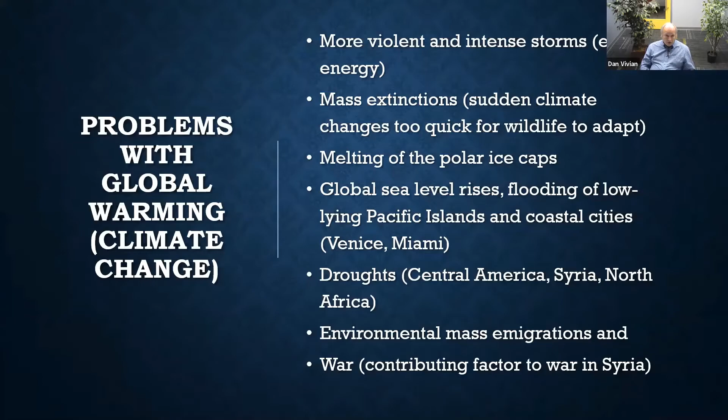And climate change is related to the greenhouse gases that are being produced by the burning of fossil fuels. So how does that work? Well, it works like this. Here's an illustration of the sun beaming radiant energy through the Earth's atmosphere. The energy shines down on the surface of the Earth and warms the Earth. The atmosphere contains a layer of carbon dioxide.

The high-intensity solar rays at the 8,000 degrees Celsius that the sun shines through the atmosphere penetrate the atmosphere easily. They shine onto the Earth. A lot of that radiation would normally be re-radiated out. But carbon dioxide captures the lower energy radiation that re-radiates out. It captures it in the atmosphere, and it warms the atmosphere up. So this is the same effect that you have in the northern climates, Canada, northern US.

When you go out to your car on a sunny February afternoon, and the sun's shining through the car windows, it warms the interior, the upholstery, plastics, carpeting, but it only warms it up to 15 degrees Celsius versus the 8,000 degrees Celsius that the sun shines in. That radiation re-radiates out at 15 degrees Celsius, but it's not intensive enough to pass through the glass.

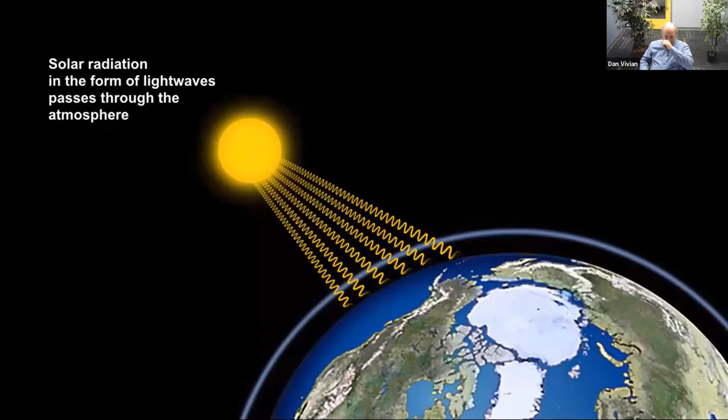So the glass itself acts like a check valve. It's a greenhouse that's happening in the car. And the same goes on with our atmosphere. So that's the mechanism that causes global warming.

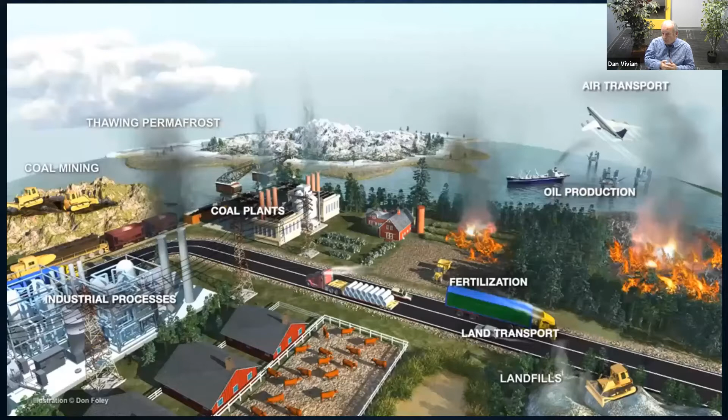Where does the greenhouse gas come from? The greenhouse gas is actually carbon dioxide and some other molecules, but the ones that are man-made, the ones that are changing the equilibrium of the Earth, are caused primarily by the burning of fossil fuels. And we have fossil fuels burnt significantly in things like coal mining, coal plants, industrial processes, land transportation, landfills, fertilizer, oil production, buildings, and air transportation. All of those things contribute to greenhouse gases.

How significantly? Just in approximation, about 40% of the man-made carbon dioxide greenhouse gases comes from transportation. This is North American, or more generally, the first world. And in the first world, those are the major contributors to greenhouse gases and climate warming. So about 40% comes from transportation, about 40% from buildings, and the other 20% comes from industry.

And oftentimes you'll hear different statistics. You'll hear, well, what about agriculture? Well, what is agriculture? Agriculture is made up of things like tractors and pickup trucks and stake trucks and transports, all on the transportation side. And on the building side, agriculture is made up of barns and farmhouses and sheds and warehouses and things along that line. So agriculture is mainly made up of those two more basic contributions, transportation and buildings. The other 20% is mostly industry.

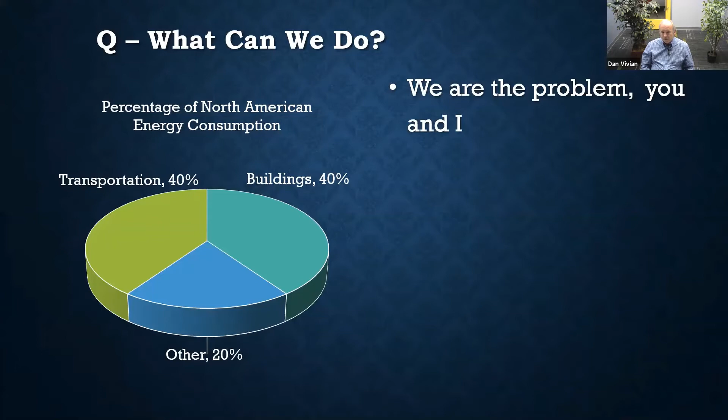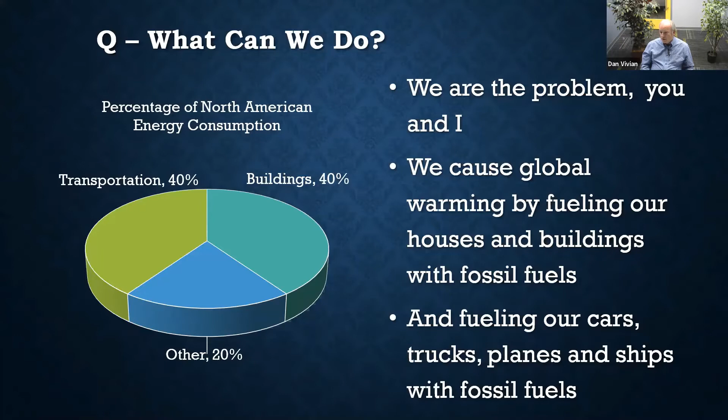So who's the problem in creating these? We are. You and I are the problem. We cause global warming by fueling our houses and our buildings with fossil fuels, and our cars, trucks, planes, and ships with fossil fuels. So the transportation and the building side. So I want to talk to you about how we can economically move our buildings to renewable energy.

Renewable energy has no greenhouse gases during its operation. There is some embedded energy in the components that make the renewable energy, but they are not as significant as the operating energy. And as our grids get greener, that percentage drops off. So tonight, I'm going to talk about the 40% portion, which is the building portion.

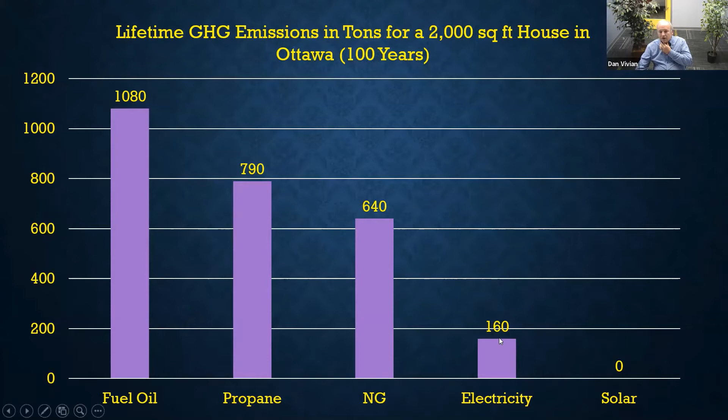So here's the approximate greenhouse gas emissions for a 2,000 square foot house in Ottawa, depending on the fuel that you use. So for fuel oil, propane, natural gas, electricity, you can see how they decrease in order. Anywhere from fuel oil, which is very dirty, over 1,000 tons over the 100 years of its life, versus solar, which is down at 0 for the operating greenhouse gases. Electricity in Ontario is pretty green. It'll be down at 160.

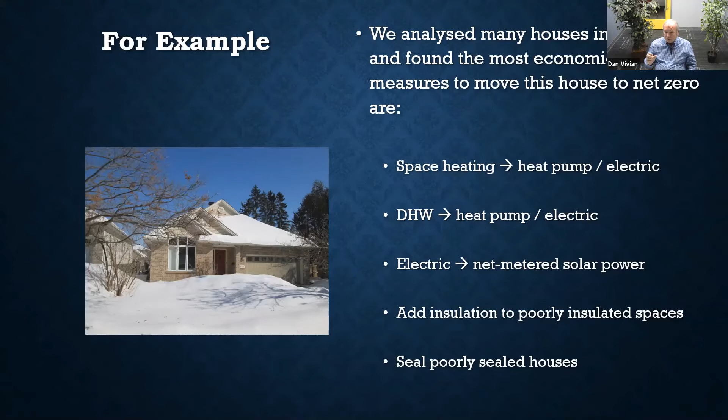We add, on occasion, insulation to poorly insulated spaces, and we seal poorly sealed houses. By poorly insulated space, I mean if your basement walls have no insulation on them. I'm not talking about a basement with some insulation; this is no insulation. Or if your attic has very little insulation, then we would top it up. And for poorly sealed houses, think along the lines of a drafty farmhouse. Those are the ones, and I'll show you the reasoning why.

Cost of solar power comes in at just a little bit less than 8 cents a kilowatt hour. And you say, well, I thought the sun's free. Yes, the sun's free, but the initial capital is not free. And so what we've done is we took the original initial capital costs of the solar panels and all the electronics that go with it, and we divide that by the number of kilowatt hours that the solar equipment will produce over its lifetime, and we come up with this dollar per kilowatt hour figure.

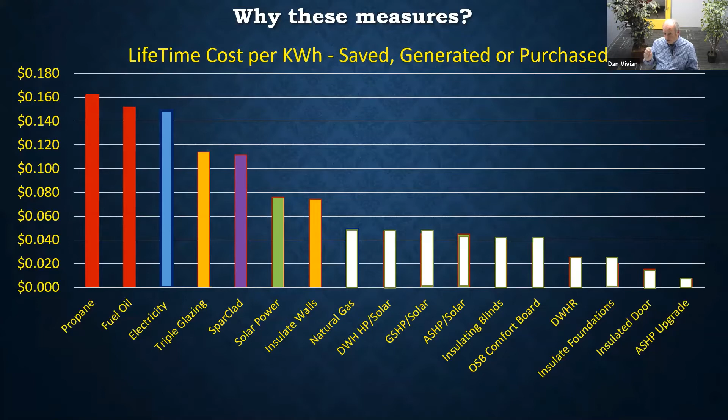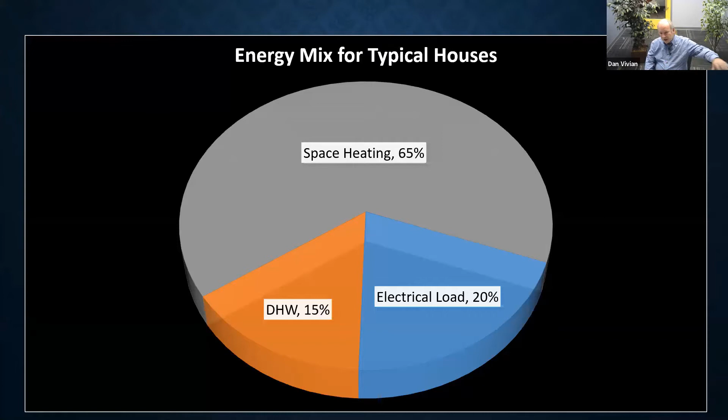So how does that affect your house? About 65% of the house is in space heating, 15% is in domestic hot water, and 20% of the house is in the electrical load. So we're going to use that insight from the previous slide to apply to our house loads. So these are typical house loads for Ottawa and actually across the majority of Canada. That's climate zone 6, climate zone 5.

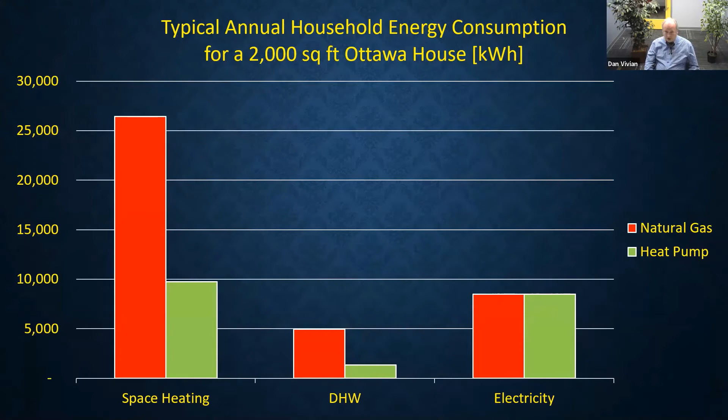So here we can see the difference that a heat pump makes. A heat pump reduces the amount of energy that is consumed because the heat pump is actually gathering environmental energy. So in space heating, you can see that the difference is about a 60% reduction, slightly larger on the domestic hot water heating, and of course a heat pump doesn't change your consumption of electricity. This is a slide on how a heat pump works. I'm going to skip through that. We're a little bit tight on time.

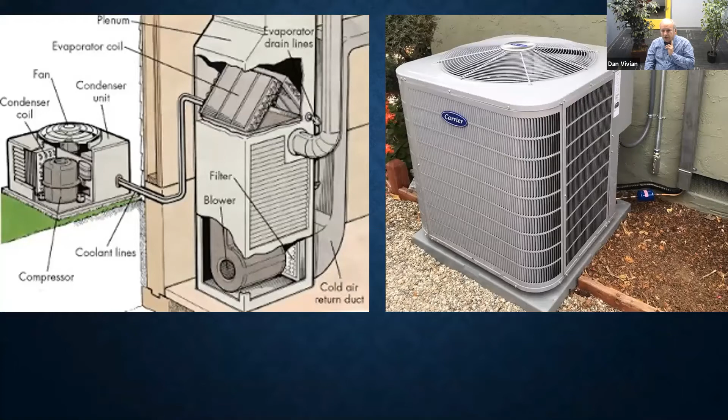Here's the important slide that I want to show everybody. This is comparing the costs of various fuels, of natural gas, to heat pumps and the decrease in greenhouse gases that are produced by using a heat pump. Remember the last slide, heat pumps reduce the amount of energy that's consumed. They reduce the amount of greenhouse gases that are produced. That's what we're trying to get to. And here's the significance of it.

So over the life of a furnace, the energy and furnace costs combined would be around $33,300. The yellow bar is the capital cost, so the cost of the furnace itself. The red bar below it is the energy costs over its lifetime. And that would produce over the 20-year lifetime 103 tons of greenhouse gases, your single furnace. The best value is actually a heat pump with a natural gas backup.

Heat pumps don't work in the extreme cold, and by extreme cold I mean about -20 Celsius and lower. They use a backup heating, and there's two options. Typically, you can use natural gas if it's available, or electricity with electric resistance. So that cost was $27,300 over its lifetime, and a reduction down to 48 tons. That's an over 50% reduction, because there's two inputs into that.

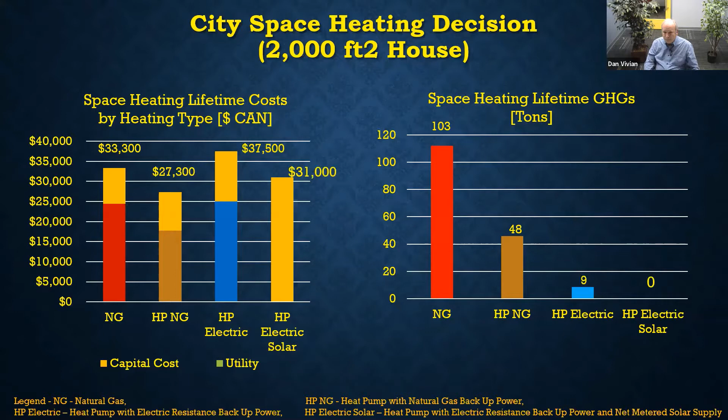In the country, this is even better. So the fuels available to you in the country are fuel oil, propane, electric resistance. Remember from the first graph, they're all very expensive. So in comparison, we're talking about over $70,000 over the 20-year lifetime of the furnace. Comparing that to a heat pump with electric backup or a heat pump with solar backup, we're saving in the order of $40,000 over its lifetime.

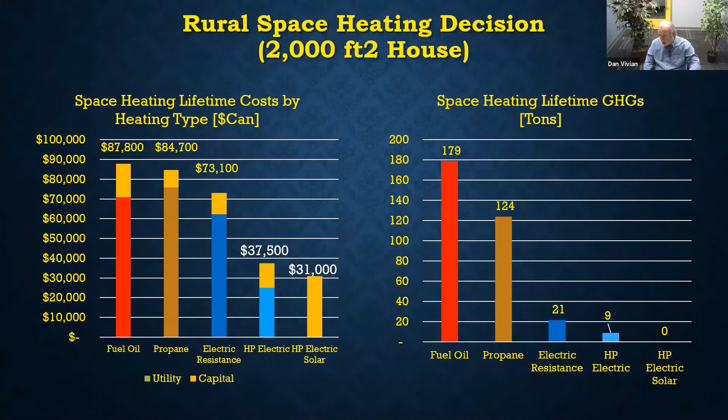Very significant. And on the greenhouse gas side of things, fuel oil being the largest contributor of the fossil fuels, we would drop down from 179 tons over that 20-year lifetime of the furnace, down to 21, 9 tons, or no tons, depending on whether it's electric resistance heating, a heat pump with electric resistance backup, or a heat pump with solar.

There's a similar decision with domestic hot water. Domestic hot water, unfortunately, you're not going to save money on that one. I'm going to go through this quickly. It's on my website, and at the end, you'll see the website.

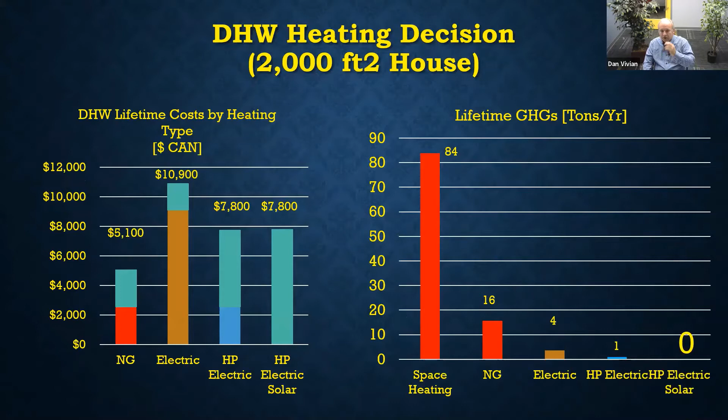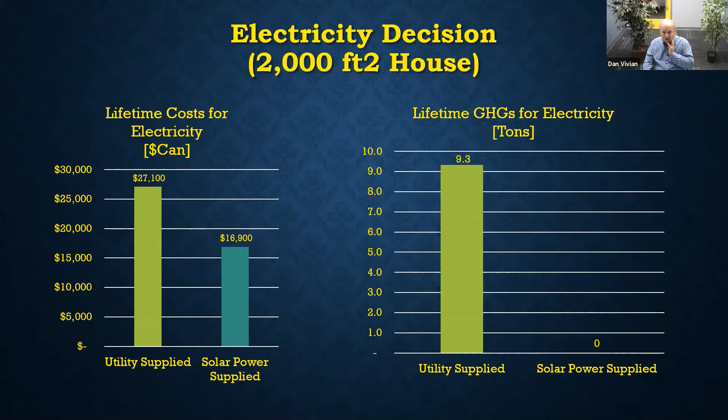When do we change our components? So I want to illustrate that we don't recommend you go out and change everything right away. We recommend that you change into the more sustainable equipment at the end of the life of your typical heating and cooling appliances and your overall electric supply. So a furnace lasts around 22.5 years. You'll replace that with a heat pump.

Domestic hot water, you can replace that with a domestic hot water heat pump, or electric heat pump, and then back it up with solar power. A boiler, offset it with solar power, not back it up. A boiler may be around 20 years, the central air conditioning 20 to 25 years, and a split AC 15 years. We do those studies. We tell you when it's time to move your equipment over.

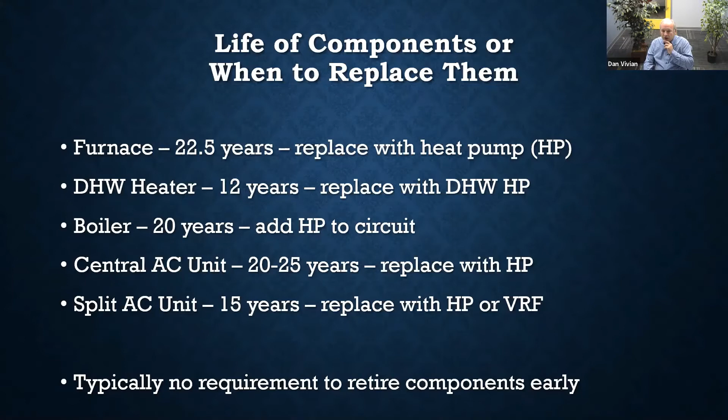We look at the nameplate data and serial number and find out how old your equipment is, and then make our recommendations. That will, over time, create a plan to reduce your greenhouse gases that looks like this. We start off with the base case at around 40,000 kilowatt hours per year and around 6,000 kilograms of greenhouse gases. And depending on the measure, we say right at the first to offset your electricity with solar panels.

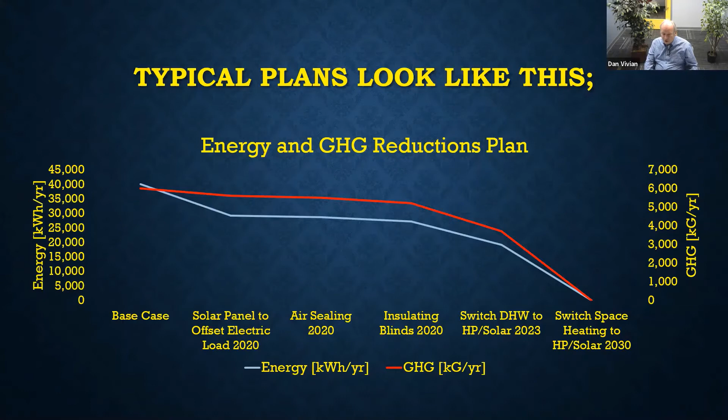And then we say whatever sort of energy conservation measure makes sense. So in this case, it was air sealing and insulating blinds. And then we switch your domestic hot water, in this case, because the domestic hot water needed to be changed before the space heating. If the space heating needed to be changed, we flip those two around. We'll do that at the end of the life of the equipment. And we set out a plan so that you can move your house, your building, off of fossil fuels, off of greenhouse gases, and it's economical at the same time.

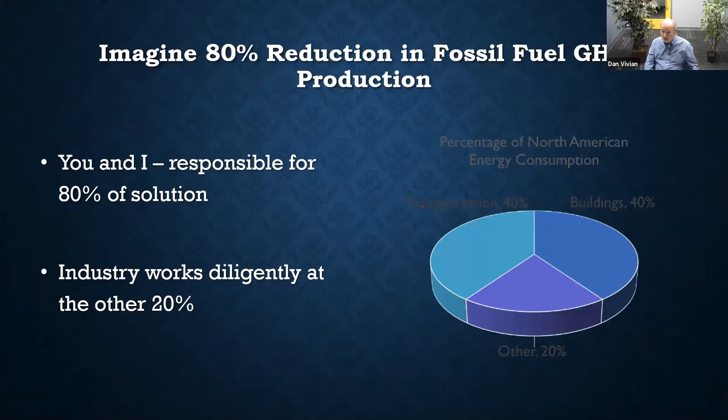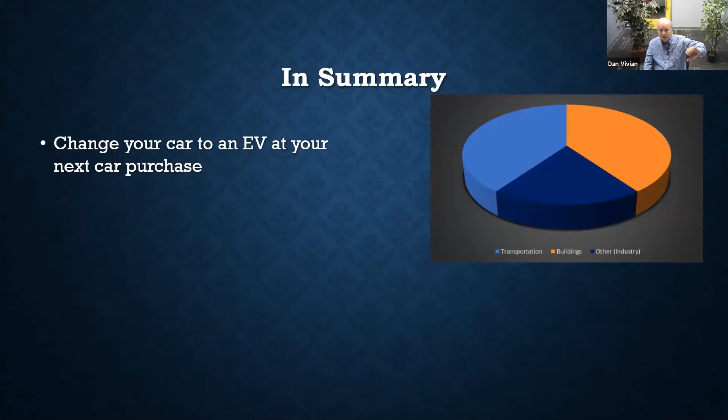So again, you and I are responsible for 80% of the solution, and industry will work diligently at the 20% that's remaining. So change your car to an EV. I didn't talk very much about that portion of it, but that's 40%. Change your car to an EV and get rid of 40%. Over time, move your house to net zero. It's going to get rid of that 40%. Tell your friends about that. Advocate for legislation within your community to assist you and your neighbors to do the same. And industry is going to get rid of that remaining 20%.

I spent the first half of my career in industry. I know that they can do it. So tell two friends, they tell two friends, and they tell two friends, and together, we're going to eliminate greenhouse gases.

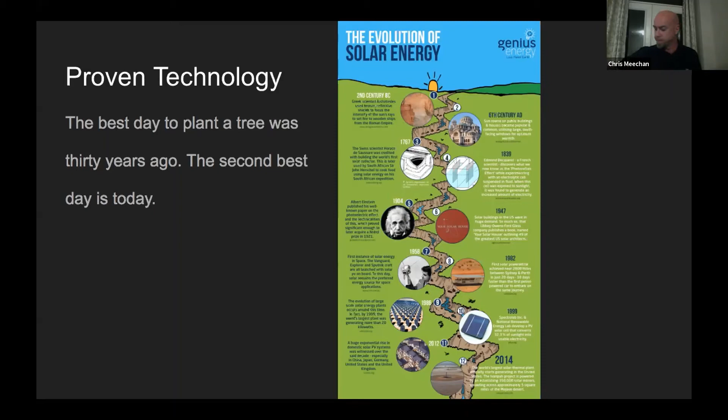So in Ontario, we are allowed to net meter, which is great. So the ability to produce your own electricity locally and consume it locally is fantastic. The feed-in tariff program, while it was around, was a good idea initially, but as time went on and panel prices reduced, and they reduced the amount that you were selling back to the grid, it got to a point where you just start using it yourself, which is a globally accepted way of utilizing a solar system for residential purposes as well as commercial.

So what's happening is the system is powering the building that it's on. So during daylight hours, for about 7 to 9 months of the year, you're going to power the building with the panels. Then also during daylight hours, you're going to send the excess electricity that's being produced back to the grid for a grid credit. That grid credit is good for 1 year.

It's similar to having a bank account. So during daylight hours, you're making deposits into the grid. During non-daylight hours, so nighttime, particularly over the winter, that's when you're making your withdrawals. So you want to make sure that you're producing and consuming the same amount in 1 calendar year.

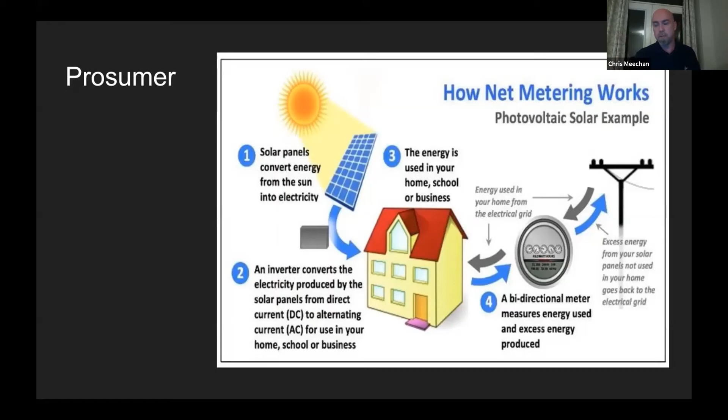The other question that I get all day long is, Chris, how much does it cost? Right? Brass tacks. What am I dealing with here? And the range is quite significant. So anywhere from 15,000 to 50 for residential purposes right now. So we have to get very specific. So there's 2 ways of doing it.

If you're dealing with somebody like Dan, NRCan Energy Advisor, he'll give me a gigajoule number that I have to offset with a generation number. That I can model fairly quickly. We look at the roof, we do an analysis on that. A lot of the time it's a new build, so it involves drawings. I'll get to that in a second, but the more traditional way of doing a retrofit is an analysis of the hydro bill for the house.

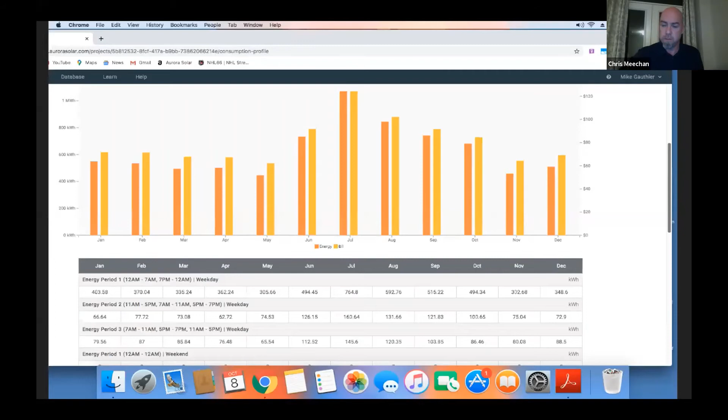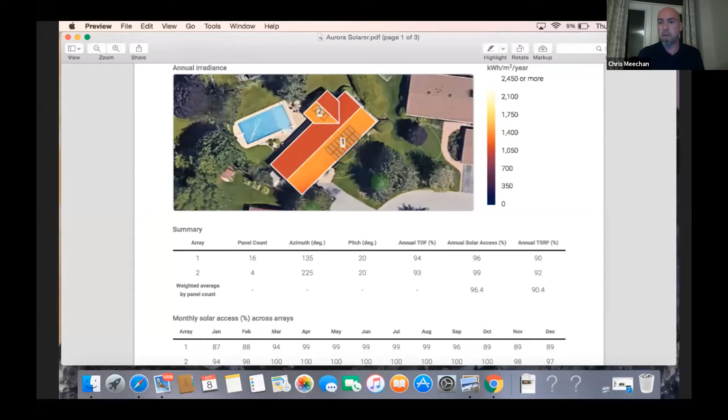So I look at the consumption numbers from the hydro bill, plot them into our software that will let me know what the needed generation for that building is going to be for the calendar year. Then I'm looking at shading analysis using the software as well as satellite imagery, figuring out the best orientation in relation to the sun, the best location for the panels, and lining that up with the needed generation numbers.

We get very specific with shading because this is a 25 to 35 year project. So we want to know exactly what's going to be taking place as far as making sure that we're putting the panels in the right location, making sure that the production numbers are adjusted for shading. So we have to get very, very specific on that. After that, I figure out how many panels you're going to need to offset your consumption. That will dictate the price of the installation.

Then it's a matter of, okay, well, how are you going to finance the project? And typically it's either done through somebody's mortgage or a home equity line of credit. There's third-party lenders, but the interest rate is usually pretty high with those. The banks have tools for this. There's a really good one that's done through Manulife One. So they'll actually finance the project and allow you to pay monthly what your solar savings would be.

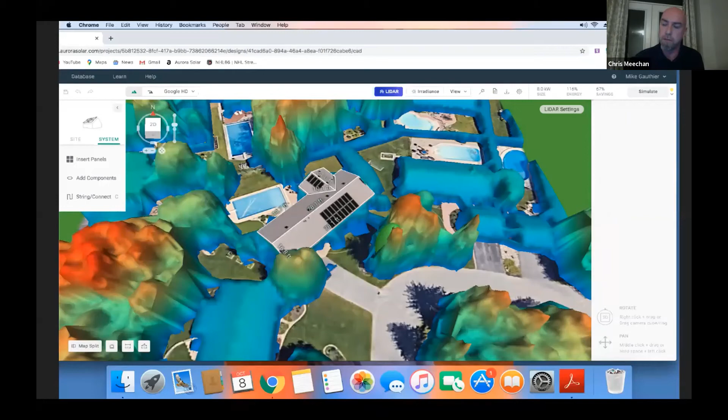So if your hydro bill before solar was $200 and post solar it's $20, then you can take that $180 and pay off the system with that. That's your solar savings. But you're not going to have $180 savings in the middle of winter. So Manulife One will allow you to adjust your payment plan based on the time of year. So again, there's different ways to finance systems, but that plays a role in what your return on investment year is going to look like for the system.

So I mentioned the other way of doing it is, well, it's a newly built home. So I'm given a gigajoule number by Dan or another NRCan energy advisor, and I can do a model, 3D rendering based on the house plans, the site plans, the roof layout, and then the subsequent shading analysis after that.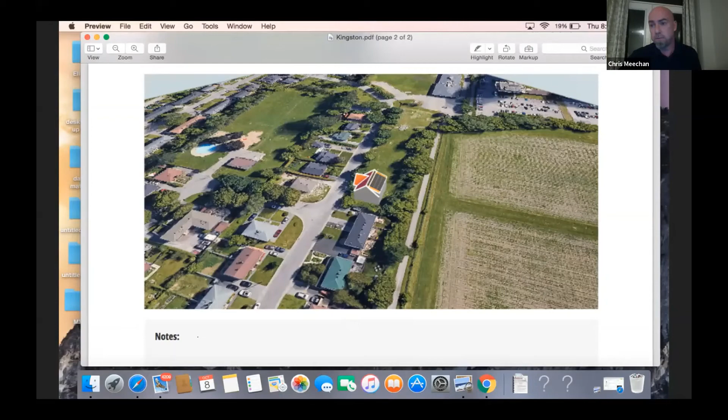This happens quite a bit when you're doing a new build, and the majority of the net zero homes that I've done over the course of the last 5-6 years, they are new builds. So you're going into it with a gigajoule number that needs to be offset, and you can't utilize somebody's previous consumption, and often there's no house there to look at in satellite imagery.

But we can still do it, right? We can still do the modeling and be accurate to meet the qualifications for a net zero house, or meet the qualifications simply if you want to be able to net meter and offset what your hydro bill is going to look like going forward.

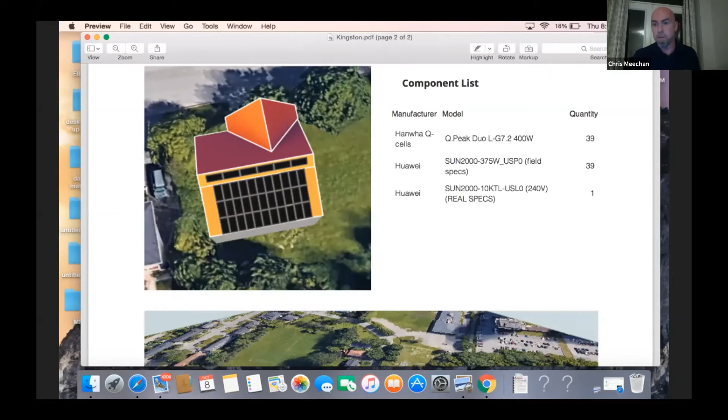There's other challenges that we run into on the design side. So if the satellite imagery in a rural area, for instance, isn't great, which is often the case, we're able to do a combination of taking some photos and looking at the house plans, and then looking at the shading that's going to be taking place from all of that. And then we can put together a system build based on gathering all that information using the software that we have.

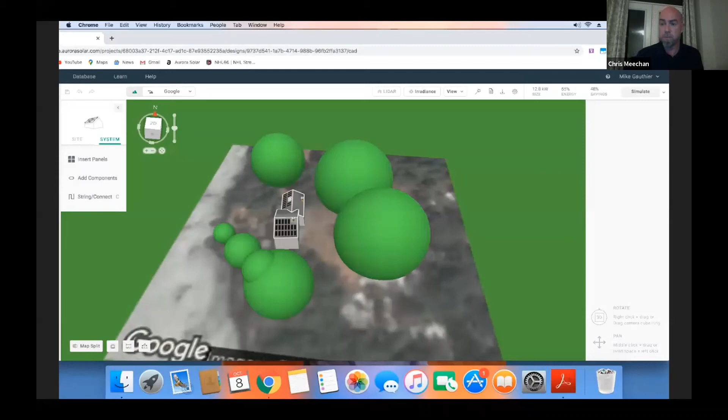If you're building a 6,000 to 10,000 square foot home, you're going to be in a situation where you're probably offsetting a portion of your electricity consumption. Reason for that is some of the rules and regulations that we follow with the hydro providers, the Ontario Energy Board. So right now, if you want a system that is going to be over 10 AC, that would require what's called a connection impact assessment. And we do them, and it's a necessary step, but if we can avoid it, then we can avoid some of the expense of the initial installation.

So sticking with a 10 AC nameplate capacity installation is probably a better way to go on a much larger home. If those rules and regulations at some point are no longer an issue, if some of that red tape is cut, then yes, that would change the system size that we would put on the roof for a larger home. But typically for residential purposes, you want to stick to a 10 AC. We can go up to 17 to 20 on the DC side because of the inverters that we're using currently. But you'd want to stick to 10 AC for residential purposes right now to avoid some of those regulatory costs and engineering fees.

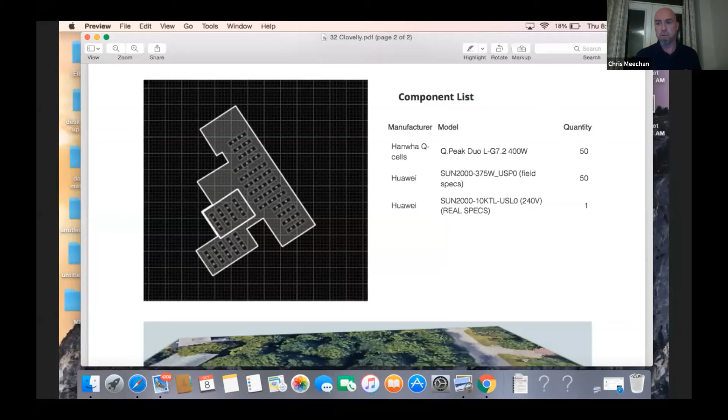During a new build, as you can see now with the software capabilities that we have, we can do the design, place the house where it's going to be, and then figure out the shading based on that, even if there's, you know, old pictures of an old house there. So I like this one because it's kind of like, well, that's what's going to be there next year, right? And that's the system size that's going to be on that roof at that location. If you drove by there, you'd have no clue that that's even a possibility.

When we're designing systems for commercial purposes, larger systems, a lot of the same rules and guidelines still apply. You're just dealing with bigger numbers. And the dollar per watt cost is lower when you're dealing with larger systems, no question about it. But again, you're going through that process with the connection impact assessment. There could be larger costs for connecting to the grid, more so than just having the hydro provider come in and install a bidirectional meter, which is typically the case for residential. There could be larger connection costs when you're dealing with large-scale commercial projects.

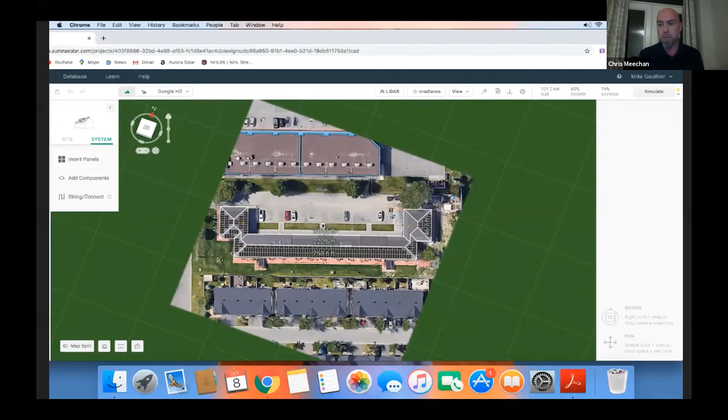So the end users vary right now. Over the course of the last 6-7 years, what I've seen is people want it for two reasons. They want to save money, and they want to be environmentally friendly, environmental stewards. Both of those I liken to green reasons. One's cash flow and the other one is the planet. Farmers have been installing solar for quite a while because it makes a lot of sense. A lot of it has to do with their loads. They're using a lot of electricity during the best generating times of the year. But it's also because they tend to be generational thinkers. So that's what a lot of it comes down to.

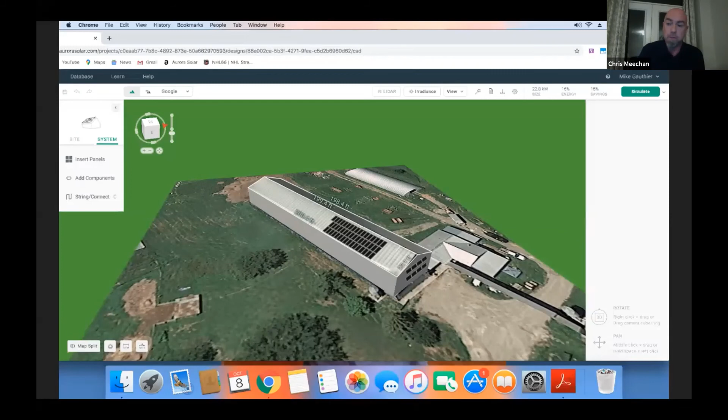Going forward, what I keep seeing is it's more middle income earners that are installing solar systems right now when they're able to get that interest rate below, say, 5%. So again, if there is something that is going to take place from either a federal or potentially a municipal standpoint, a financial tool for installing solar, that would be great because it would lead to mass adoption. And I believe anybody that is willing to once a week go through their garbage and recycle and put it outside would probably like to have a solar system on the roof. I could be naive there, but I think that if you're willing to go through that process every week, then you probably want to be producing your own electricity for less money than it costs to pull from the grid.